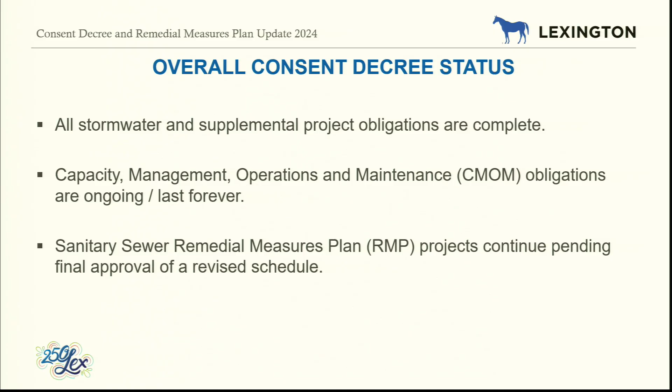The RMP, the sanitary sewer RMP projects—that's really what the focus is today, because we've been pounding on that rock for a long time, and we will continue to pound on that rock. That rock got particularly hard around COVID. The pandemic completely blew the wheels off of all the momentum that we had, given that we had to average between 6 to 8 projects a year under construction and complete. That was virtually impossible to do when the pandemic came along. Even in the aftermath of the pandemic, supply chain issues and cost escalations created a lot of challenges. We finally are, I think, beginning to get our momentum back now from that event.

Through the course of that event, we had petitioned EPA about giving us more time. When we negotiated the consent decree in 2006 through 2008, nobody contemplated there would be a worldwide pandemic like what we went through. We felt like we could justify, and we did, that we needed more time. So in September of this year, EPA went back to court, and the federal judge approved an extension for the consent decree.

It was 2026. Now it's 2030. What a relief. Now, it seems like a long time, but in our world, it's not. It takes a really long time to develop and build these capital construction projects.

I keep wanting to always think about Buckhorn because we get complaints all the time from there. Anyway, it's been a long project. This was the project we came up with that avoided going across Overbrook Farm. As disruptive as this has been, I keep reminding people we basically saved $25 million by going in this direction, and it's finally beginning to wrap up. I think the pipeline will be in service probably sometime in the spring of next year. We're working feverishly to get the paving done.

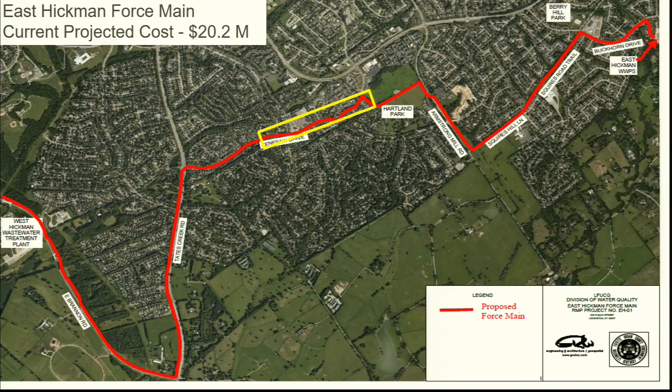That section right there in the yellow box probably will not get done. The best we can do is probably get the concrete up to the surface and try to smooth it out for as much as possible. I make the personal sacrifice on that because I live inside that yellow box, and I get reminded by my neighbors every day about how the road is still messed up. But we're getting there with that one. It's important because it's the connection point for this project.

If you've driven out Armstrong Mill Road towards DeLong, you probably noticed a lot of work going on in the field, and you're right. That is the DeLong Road pump station, and hopefully it will look just like this. You wonder whether the artist rendering is actually going to be the reality. I don't know who that guy is right there.

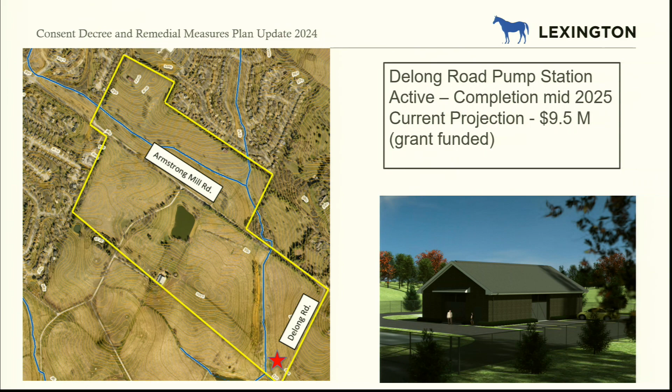This one I think is actually finished. When I put this presentation together it was active, and it's not anymore. I keep getting my buttons messed up here. There we go - this is what we call the Wolf Run F trunk sewer. It comes along Wolf Run and comes up behind Frisch's, what I understand may not be Frisch's much longer, and went under Harrodsburg Road, a couple bores, worked its way across Clays Mill Road, came up South Bend, and has stopped here on Lafayette Parkway.

Lafayette High School is roughly up here where the blue horse is. I had the yellow box around it because they were still working there, but when I went by last week, it looks like they've wrapped up.

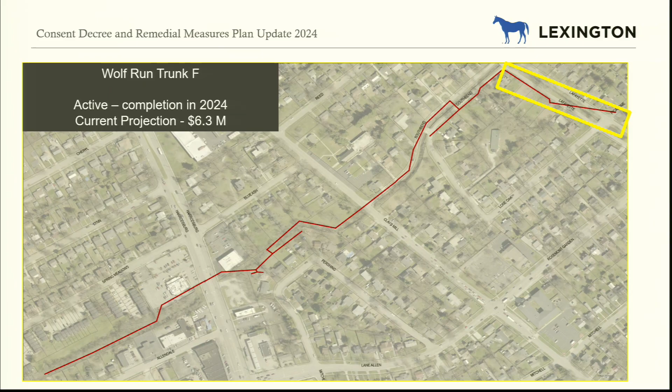The particular interest for the neighbors has been how good they've been out there. They've really been very cooperative for what they've had to go through, not with us, but with Kentucky American and all the other utilities - we've got a laydown area on these three lots that were bought as part of the Stormwater program for flooding abatement. They would desperately like to have those lots back, so we're working really hard to get the next leg of this, Trunk G, underway. It's out for bid right now. I think it's supposed to be awarded on the 17th.

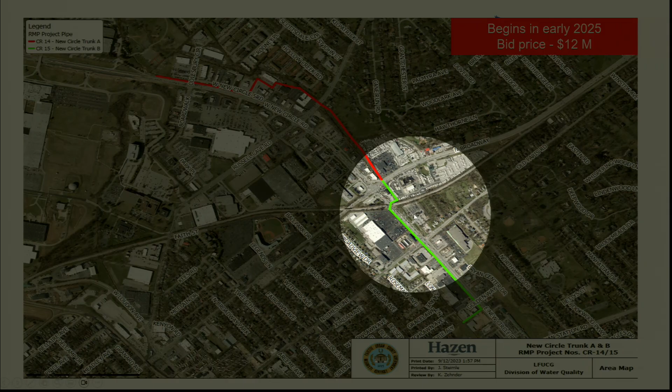There's the tennis courts for the park there. And basically coming along, we're not in New Circle itself - we're working on access roads through parking lots and everything else, working our way over, and then we cross over roughly where the railroad overpass is, and then come along what is the old Kmart building, which will actually soon be the new water quality building, and then come along New Circle here and tie in on this end.

This is one of those projects that impacted the cost graph I mentioned before. The original budget for this was $9 million, and you can see it came in at 12. So hopefully that is an anomaly and not necessarily a trend.

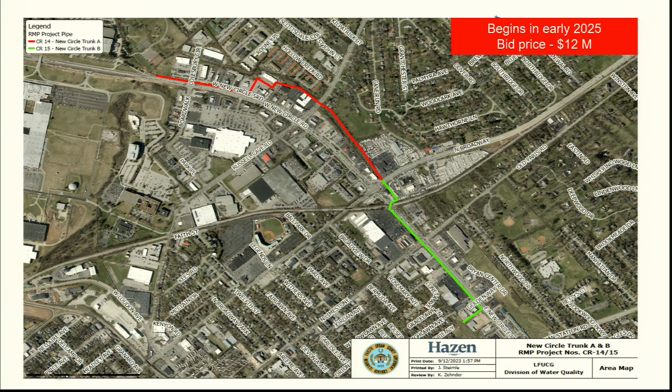Stonewall Equestrian Estates basically has a platted field that they use for storing horses. That's why they call it Equestrian Estates, I guess. And so our sewer goes down the middle of it. We spent a lot of time working with them because they were equally concerned - it's their horses, their pets, their investment and stuff.

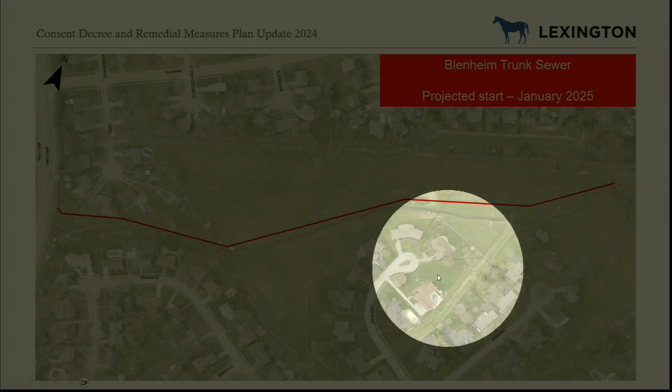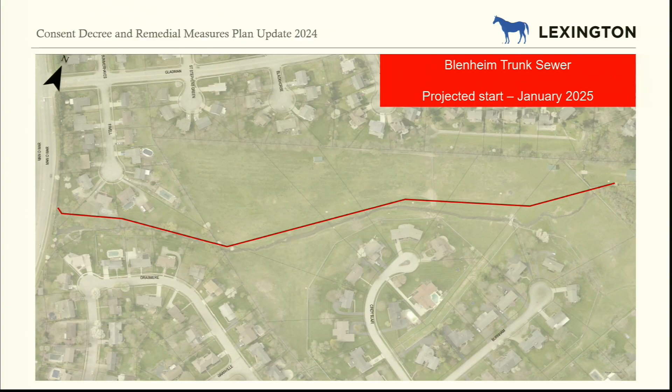And how are we going to be able to protect those horses while we had heavy highway construction going on, using basically the access way, one way right through here? Well, we finally decided we're boarding their horses. We're going to pay to board them for 5 months, 6 months max. Basically get them out of there. It'll make it easier for the contractor, it'll put them at ease, and from the overall expense, it's not that great. We've never done that before, but there's always something new every time in RMP world.

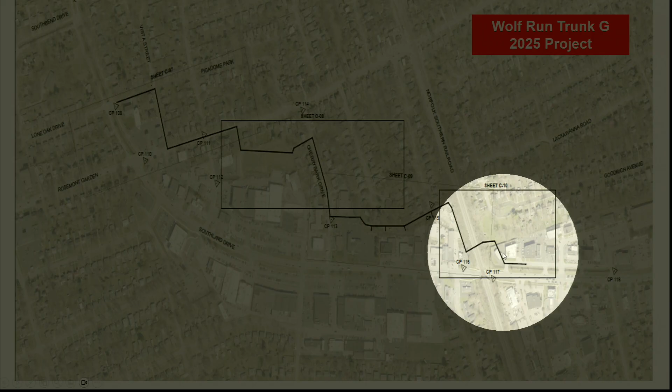This is Rosemont Garden, back behind the businesses on Southland Drive. Basically here we go through the back parking lot of Milward Funeral Home, along these properties here that we actually already own, and then cross over. Here's the dry cleaner, and basically it ends just past the dry cleaner. So an example of why getting that dry cleaner and getting that site cleaned up was important to us from an RMP standpoint.

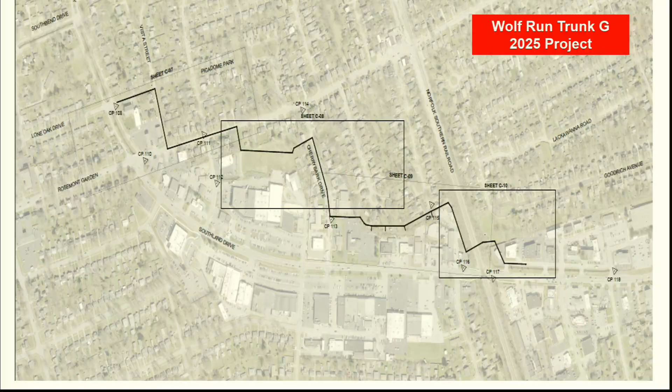Moving back across town, I like to get everybody jumping around back and forth here. This is the Floyd Drive sewer. It is pretty close to being ready to be bid, so it will be under construction next year. The impact is going to be really here on Floyd Drive because we're in the middle of the street, and we're going to have to figure out some kind of traffic management plan.

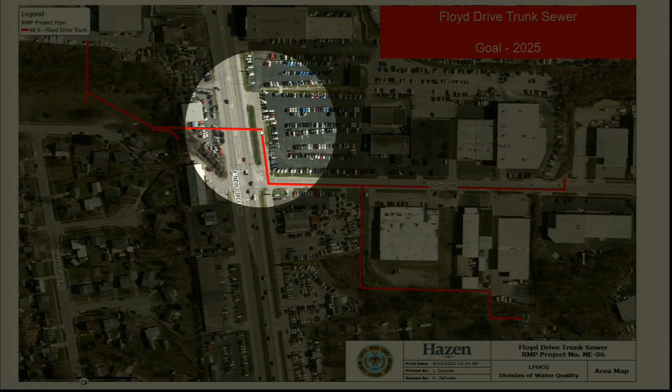The good thing is they'll come down here in front of Green's Toyota, but there'll be a bore pit built right there and a receiving pit built there, or vice versa, whichever way they've got it laid out, because you drill under New Circle and pop out onto these properties down here. These are also flood abatement projects, properties that were purchased by Urban County government several years ago. But if you do any business over on there, be watching for that come springtime.

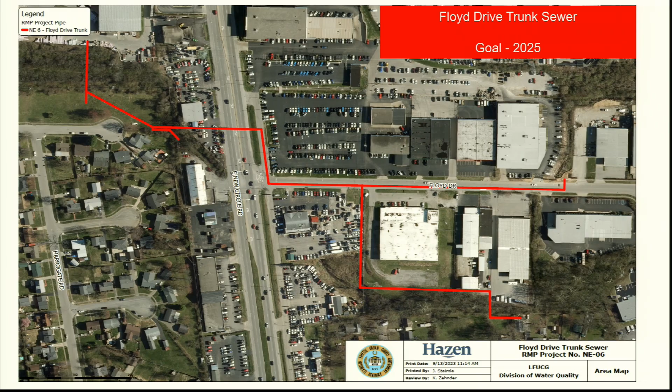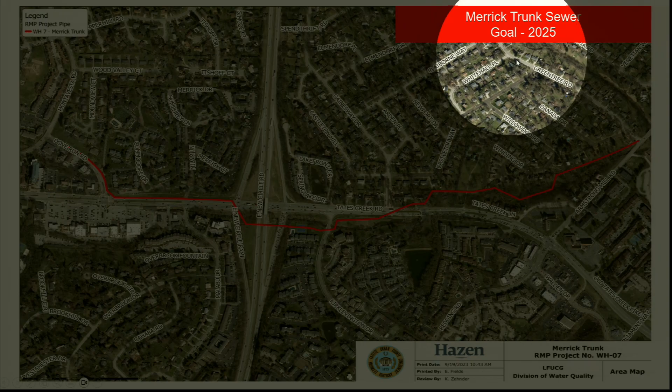We'll be there. Last one I wanted to highlight a little bit because this one's been very, very difficult, and this will be an in-your-face one for everybody that lives on the south side of town. This is what we call the Merrick Trunk. I made light of Green Tree and Gainesway and all the havoc that we had there for the last 18 months. There's another project that starts from that lot where we've been storing stuff at Armstrong Mill and Green Tree for what seems like forever.

There's another project that comes back behind the properties here on Willowwood and works its way along the creek and then across Tate's Creek Road. We have to bore all the way under these ramps for New Circle Road. And then when we get on the inside on Tate's Creek Road, we're basically in the drive lane.

We're going to have to come up with an Uber traffic control plan for that, because if you come from the south part of town and you're trying to come in via Tate's Creek Road, it's going to be a challenge. You're nodding your head.

Yeah, I live down there, so yeah, I may leave for work at 3:30 in the morning just so I can try to avoid it and stuff.

We've been working on this one for a while because the easements are very difficult. Somebody had mentioned to me a few weeks ago about ecologically sensitive areas. I mean, this area down here is one that I'm really worried about because we're just so close to the creek. We make a couple of creek crossings. The original sewer comes back behind these houses and is basically in their backyards.

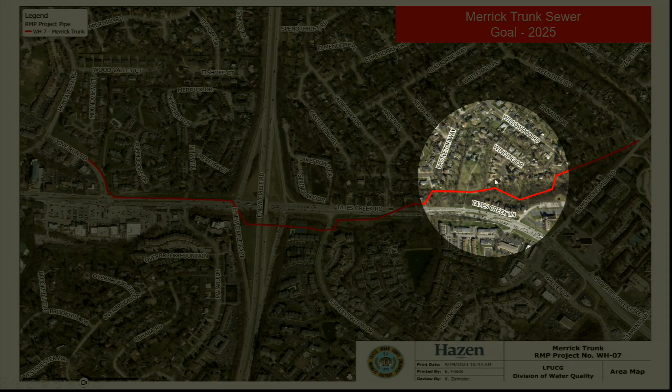So we moved to the other side because this is a remnant property basically owned by nobody. We spent a lot of time trying to figure out how to get an easement. I tracked down the daughter of one of the 4 people who owned it, and she didn't even know it ever existed. It was owned by a corporation that has since gone defunct. Tracy knows all about those kind of things. That happens, unfortunately, all the time. But anyway, a lot of work that we're going to have to do in trying to make sure that we protect those stream banks in a post-construction manner, and we're still working through that.

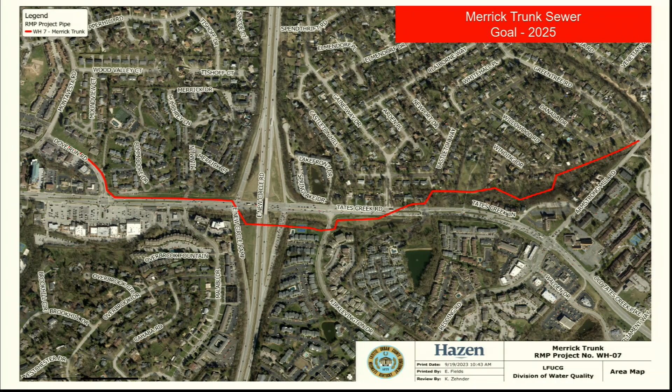Other projects that are in the queue, the Trunk F project, which is in the 5th district. It's back behind the houses on Barrowwood in the woods, just on the downstream side of Alumni. A lot of trees, a lot of really expensive houses. We've already had one public meeting out there.

It's funny how people are. You know, I'm advocating to people that we do everything we can to try to avoid trees. You can't replace a tree. You can replace a yard, you can replace a lawn, you can replace fences, you can do all of those things. And we see this all over town with the projects we've done already. It looks bad when it first happens, but when it's over and a couple of years go by, you really can't tell that we were there before.

But, you all know this, if you take down a 100-year-old tree, you ain't gonna get that back in our lifetime. But it was funny, nobody at the meeting was ready to sign their easement document, but they were ready to sign their neighbors that caused it to go over into their yard as opposed to theirs. So we're going to be working through that one in the queue, but I'm not so sure we're going to see that for 2025. The Plainview trunk, I think we're ready to go with that one. It's just a little small segment by New Circle and around the Alumni Drive area.

And then the East Hickman Pump Station Phase 2, this was an ARPA or a Cleaner Water Kentucky grant-funded project. What's interesting about this one, this is the pipeline that goes through Buckhorn, Kennesaw, the big pipeline I showed you at first. That's a long pipeline, and long pipelines typically equate to odor issues. So we've done a lot of research in the odor area over the last 18 months, and we've seen some places that are using a system that is injecting oxygen into the line with the sewage in order to be able to keep the oxygen level up and not allow it to go septic.

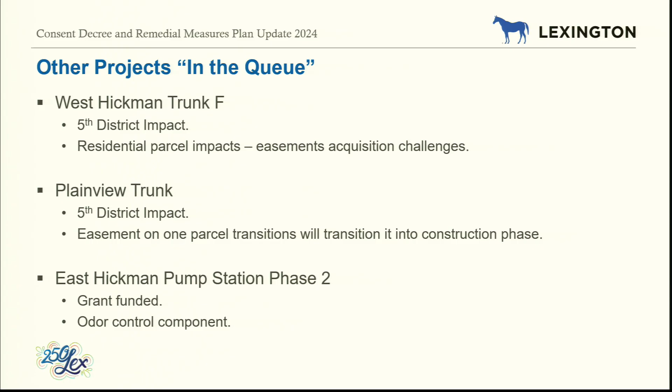All right, in summary, full compliance deadline is now December 31st, 2030. 65% of the capital projects are complete. Of the 117 reoccurring SSOs that were identified in the consent decree, 86 of those have been abated. We're getting there. We're really getting there. The total project cost is trending below, but I do worry about cost escalation. You know, it's the reality. The cost is one thing.

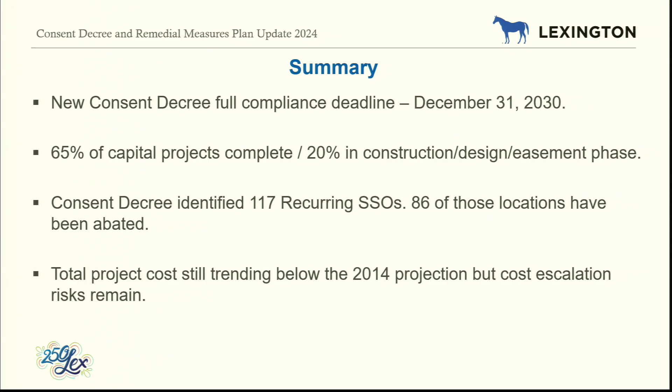What is really troubling for us as much as anything else, supply chain is still a big problem in my line of business. If it requires a chip or something to turn on the pumps, you wait forever for the thing that actually turns it on. I've got one project right now. We've had the pumps in dry storage for 11 months waiting for the control panel to be able to install them and turn them on. So, okay, with that, questions? Yes, sir.

Yeah, odor control is not part of the RMP, so I didn't cover it here. I only brought that up because it's related to that other project. I felt like it was better this year, and I really thought it was better this year until we got to October. When we got to October, it seemed like it kind of went backwards on us pretty quickly. We've made several improvements at West Hickman already. There's another project that will be starting sometime after the first of the year that replaces the activated carbon units that we have back there.

One of the biggest things we did is we cleaned up the plant. Prior management had kind of let things go in a way that wasn't apparent to me until the odor complaints started happening. They weren't managing their solids correctly, and basically the plant was constipated. And so we spent all of last year hauling sludge out of that plant. I think it was in the month of February last year, we did 53 trailers. By July, we were doing 80 trailers a month. So, I mean, we just hauled and hauled and hauled.

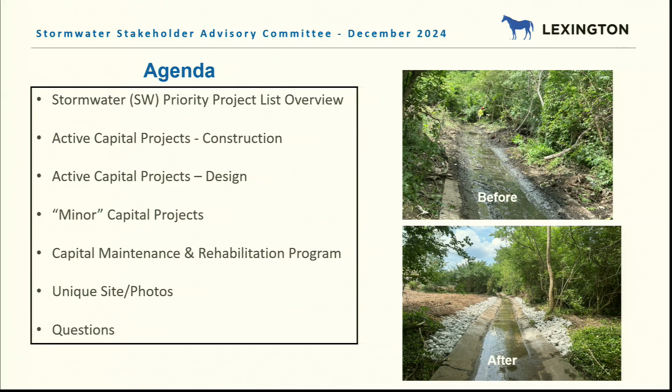For the priority list, to become a capital project, it goes through several steps. First step is we've got to be notified of the project. It has to come through like 311. Charlie, Greg receive a call, I receive a call. So that's the first thing, just us being notified. Then we'll go out and investigate.

First step in this process is the storm event. The storm event that we hold to this is the 25-year, 24-hour event. Anything over that, a 50-year event happens, our system can't handle it. So there's a limit to what our system can do. If it is under the 25-year, then it moves out to a maintenance issue on flooding. Like, what's going on? Is it something that can be cleared up through leaves or blocking an inlet? Or has a basketball got stuck in the storm pipe? So we'll see if our maintenance crew can fix the problem.

If they can't fix the problem, then we start scratching our head going, hey, there's maybe something going on here. That's when it turns into a preliminary engineering report, where we actually start seeing, can we see what's going on? Can you model this? And sometimes even though we get to that engineering stage, that doesn't mean there's always going to be a solution. Sometimes there's just not a fix here. But if there is, then we figure out the problem. There's an equation where we compute the severity score with the others, it gets ranked, and then it'll get a green light to get on the list.

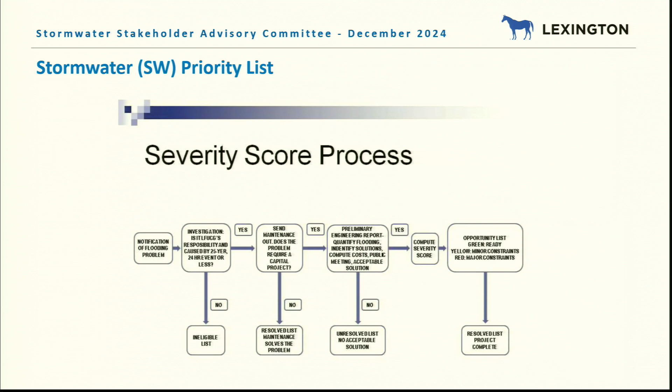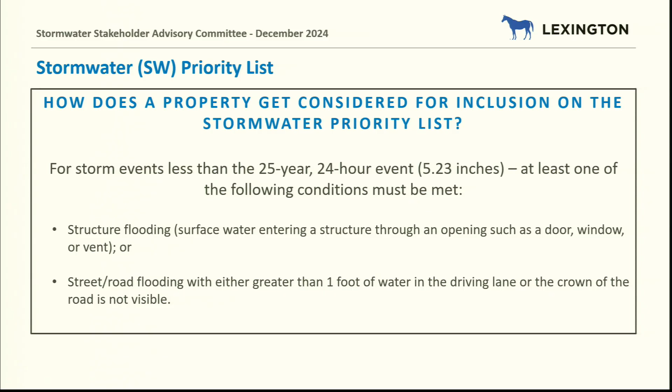So like I said, the two biggies to make it to the list: one is the storm event. It's got to meet the storm event. The other is street and road flooding, this bottom one, with either greater than 1 foot in the driving lane or the crown of the road is not visible. So one of those two has to happen.

Where's it at? You can go to the Stormwater website. We keep this list updated, we try to update it every January. The link's at the bottom. I know we've recently updated our website, I think it's still kind of the same. If anybody goes there, they can see it's ranked from 1 to, I think, 100, somewhere in between. We start at the top of the list and work our way down. Right now, we're in the high 80s, low 90s, so we've been at this for a while. And some of the capital projects that we're getting ready to talk about are coming from this list.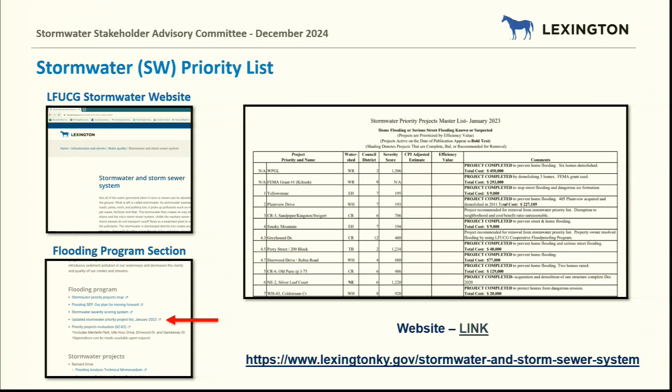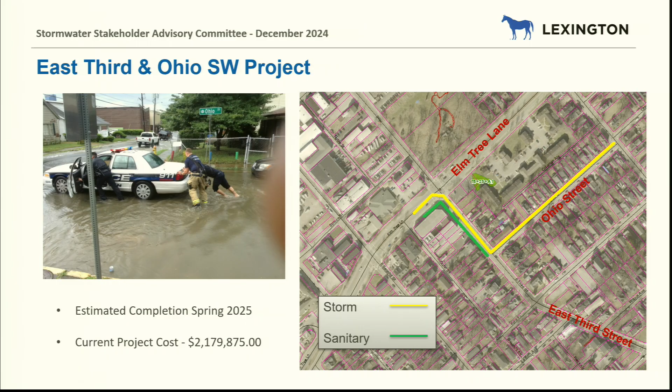Currently, the contractor is about halfway up Ohio Street, planning to finish late January, early February. Cost for the project right now is around 2.2, is what the bid was. Just some construction photos that I grabbed along the way.

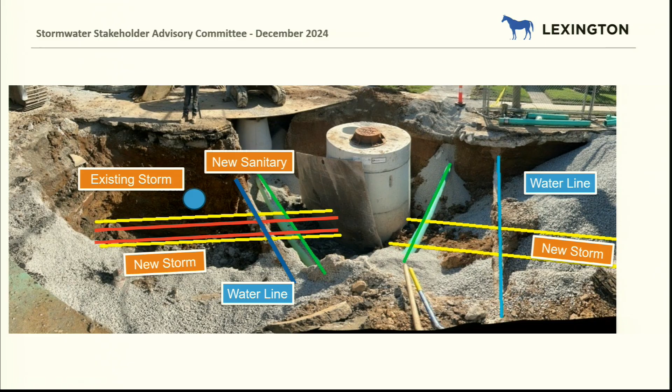I like this photo because whenever you're, be it storm or sanitary, working in town, you have a lot of utilities to encounter. The new storm is this yellow line coming this way. There's an existing storm, the 2 red lines, that's being replaced, the existing or new sanitary coming down, a water line, another sanitary on this side, another water line. There's a gas line also that I don't have in the picture. So there's a reason some of these projects don't move as quick as they do out in open fields. I just thought that was a neat photo.

Another project that just finished up this past fall is Lyon Drive.

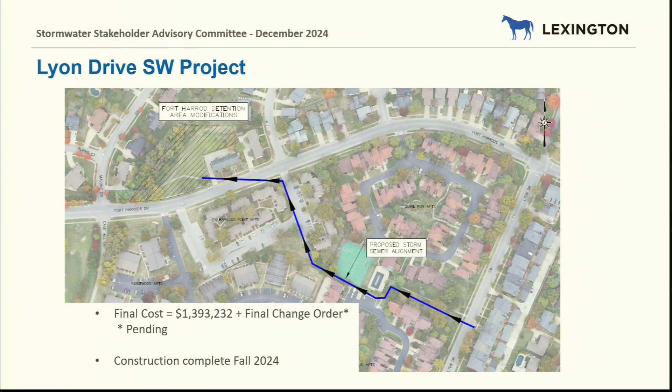This project was fixing flooding over here on Lyon Drive. It's cutting through two apartment complexes, around a tennis court, around a swimming pool, and in the upper left is a detention basin that also got rehabbed through this project. It came in a little bit over 1.4, and like I said, just completed this fall. Like Charlie said, during construction it does not look good, but post-construction, that's when we're trying to get everything back to the best as possible.

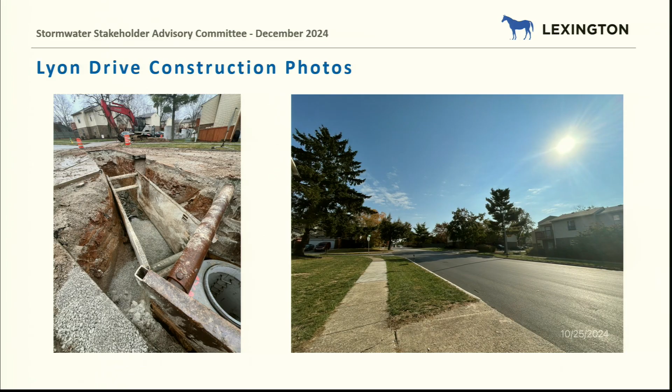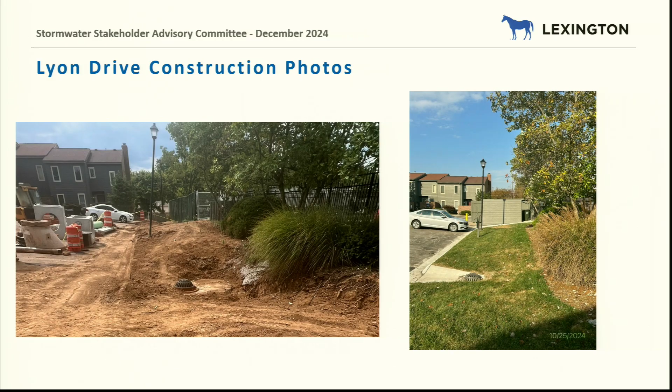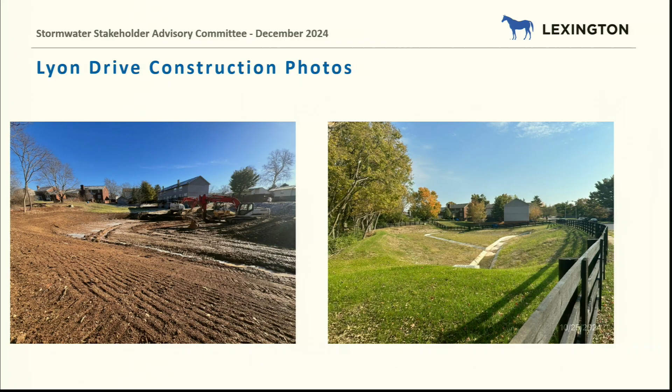Next project is out Joyland. This one's a two-phase project. Last year I spoke about phase one, which installed 3 detention basins. Just from the size of it, we kind of had to break it up into 2, because whenever you have a severe flooding issue, you've got to have a place to put the water, so we're not passing it downstream. So first phase was creating the detention to put the water. Second phase, which we're getting ready to do, is the infrastructure to get the water to the basins.

So phase one's complete. That was creating detention on Lisa, Cabot, and Shandon. Phase two is going to be creating the new infrastructure. Phase one came in a little under 1.3 million. Phase two, we applied and were awarded a FEMA hazard mitigation grant for a little over $1 million, but just for construction, $999,000. Low bid came in a little over $1 million, so we've already got awards, and it's going through council right now for approval, with the intention to start early '25.

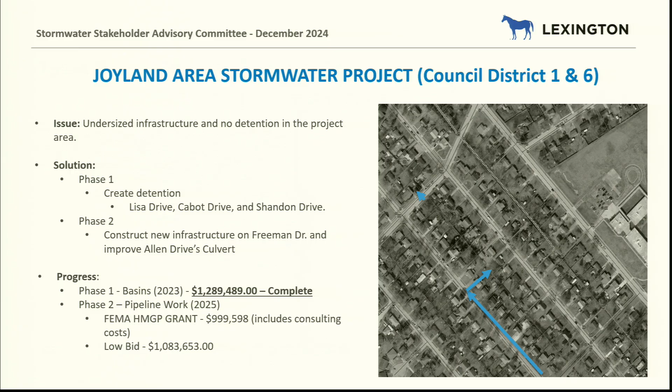So these next couple are projects we actually have in design. Cooper Drive, 2 areas that this is addressing. One is some flooding right here on Cooper, and then up here on Romney. This project's 100% complete. We've got plans ready to go out the door. Kind of just holding them right now through winter, so we'll hopefully get better bids after the holidays. Estimate's going to be around the 2.5 mark. Traffic control is something we've been working through, but we think we've got it pleased.

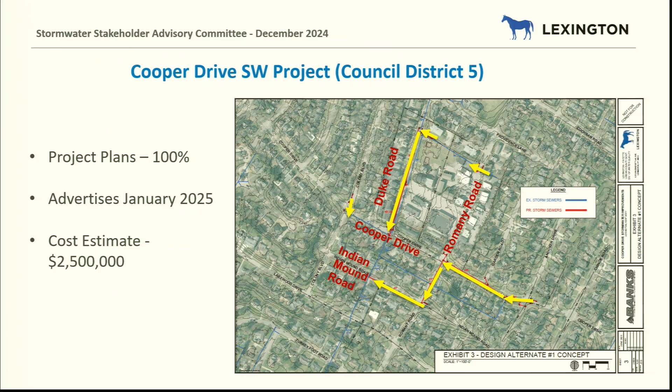Mentelle Park North, down here to the south is Richmond Road. This is also broken up into 2 phases. These are all on the priority list. I think this one's like number 87. This first phase of Mentelle is going to be addressing flooding on Mentelle on this northern section, taking new line up to Cramer, and then from Cramer down North Ashland, and then tying in to the existing system there.

Will that project improve the stormwater sump pump flooding that occurs at Ashland and Cramer? It completely ices over, and I have a friend that has a front seat view to children falling in the intersection every morning, all winter long. Where is that? Ashland and Cramer? Yep. The Cramer sump pumps flow down the street and pool in that intersection and then freeze.

We had a public meeting a couple weeks ago, and I think that intersection was mentioned. So we've told our consultant to keep that in mind as we're working through final design. If everything goes good, target for construction's late next year. But we always get into two big issues. Charlie mentioned it. One is easements, because that's a big hold up. Another one is existing utilities; until we get into final design, you don't know if we're going to have a conflict with a water line, gas line, or something. Their budget might not be at the same pace as yours, so that's where we're at right now with this one.

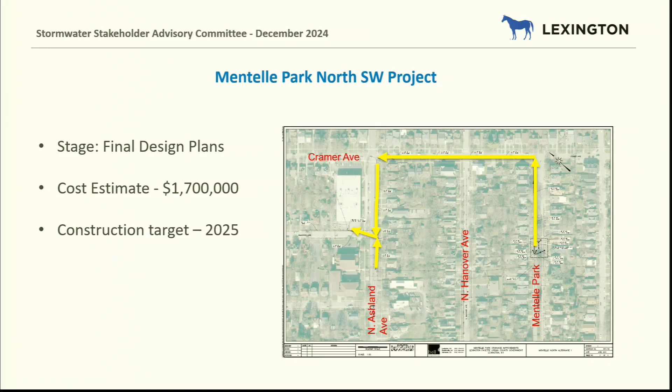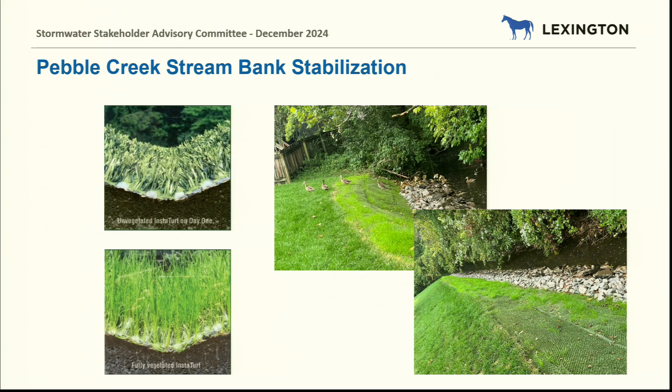So some minor capital projects that we've got going on. Pebble Creek stream bank stabilization. This is kind of cool. We used a new product called InstaTurf. You can kind of see the before and after on vegetation. This thing sprouted up like crazy. So tickled with this, as you can see in the photos. Some of the ducks are as well.

Elizabeth Street culvert. I can't remember what the cross street is. The culvert runs kind of like that across the street. A third-party garbage truck got too close to the curb inlet and actually collapsed the curb inlet, which in turn collapsed the culvert. So we've got it rehabbed right now, but we're going through a design to replace this culvert just due to its age, and get everything fixed back.

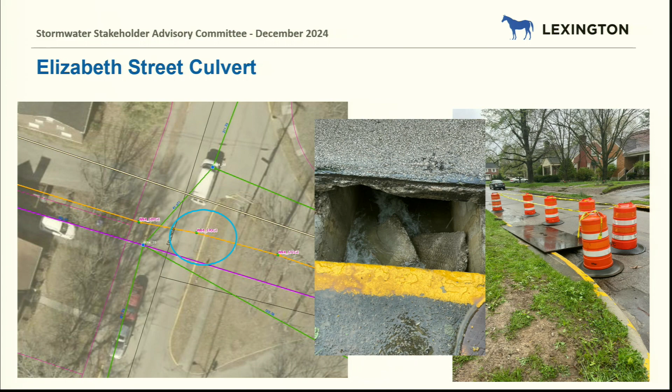You can kind of see some of the older brick on top. Town Branch culvert, very similar.

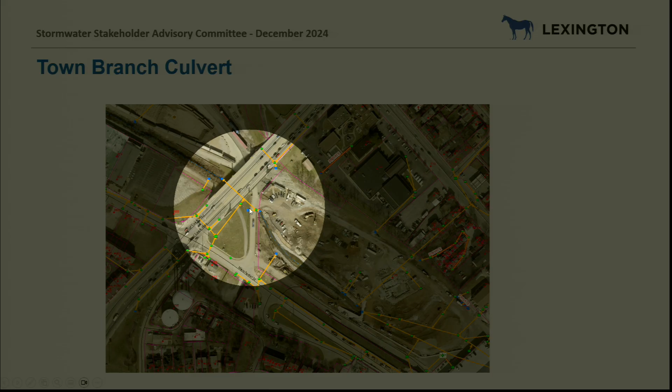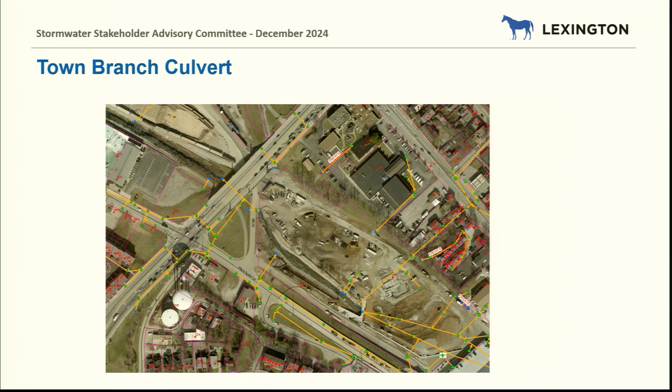Right around here on Cox Street, there used to be a curb box inlet that was removed. This is the big park project to the southeast of this. The curb inlet was removed, but the box was never actually rehabbed, so this project's going to be going in and actually fixing this hole.

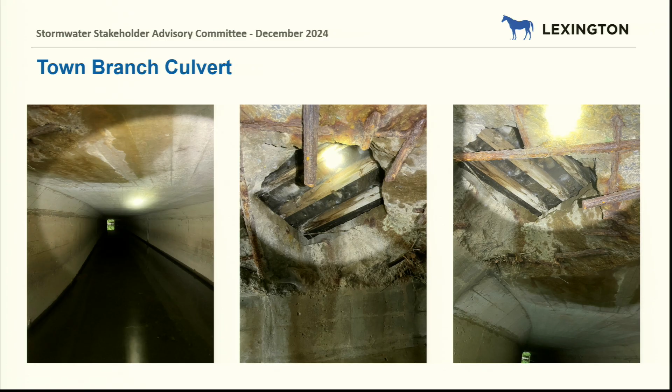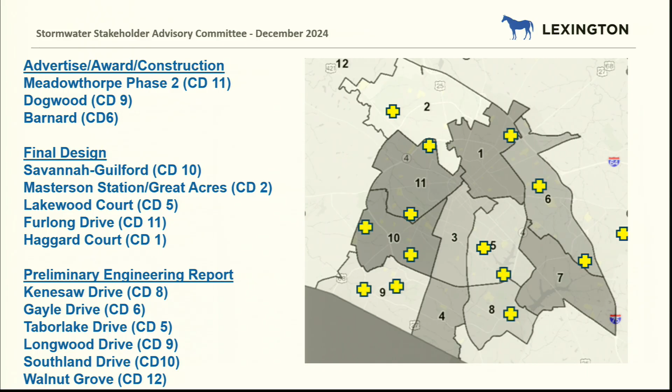So the infrastructure program is a program comprised of three full-time employees that have a $1 million budget to rehab or fix any existing stormwater infrastructure throughout Fayette County. The urban service.

With our GIS, I had some numbers pulled. We have I think it's either 905 miles or 805 miles of storm line, and over 50,000 structures, be it head walls, inlets, manholes. So there's a lot of infrastructure that needs fixing.

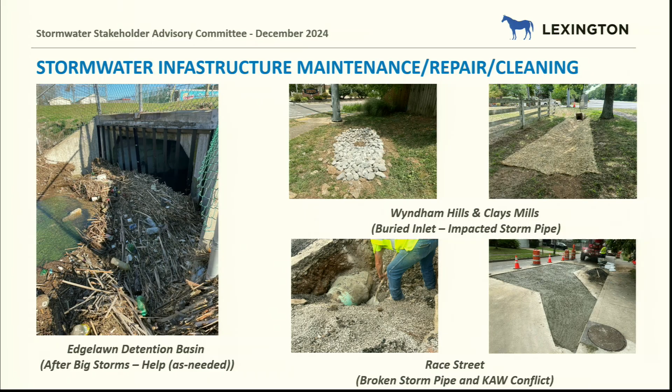We get a lot of debris that kind of collects on some trash racks that we'll help with. Inlets full of trash, cleaning flumes - they'll work all hours of the day. Debris blocking, and then broken inlets we see probably the most.

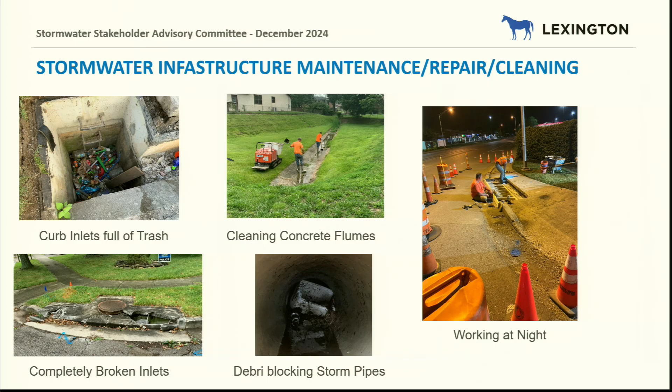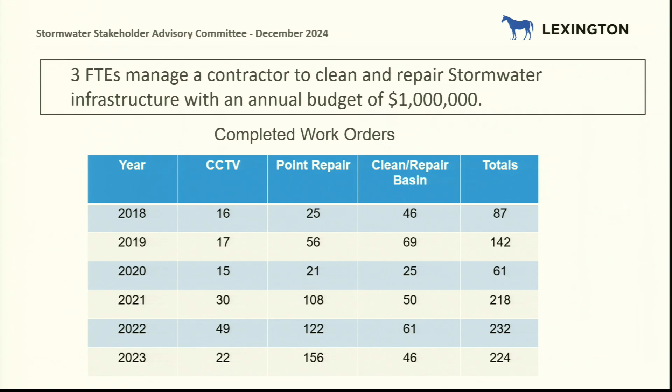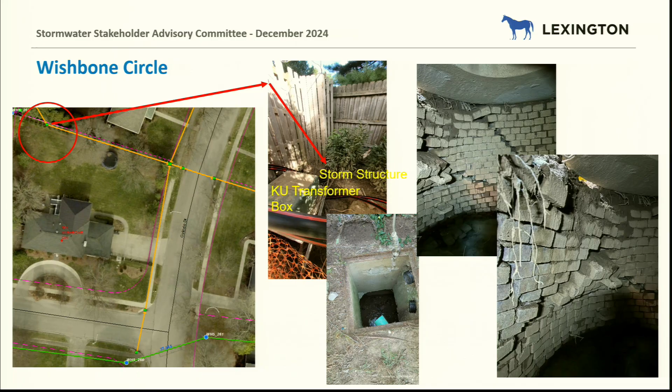Werne, this was kind of interesting - this blue line is kind of in conjunction with this picture. You can kind of see the water is kind of pulled up out to this lower half of the cul-de-sac. And this is a normal, just everyday summer storm event, so nothing, it's not a crazy thing.

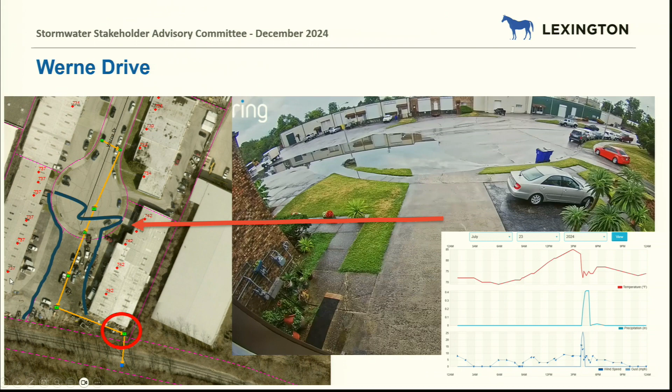Well, they went down and found - I put the little hydrograph - they went down and found this structure right here is just completely impacted, this one on the left. So they cleaned that up, was able to put a structure in, then put a grate, did some stone around it.

The whole little commercial group out there is tickled to death. They've not had an issue since.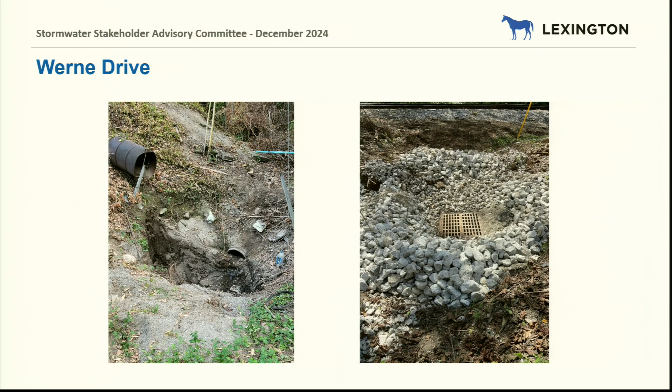Crossbores, see this a lot - gas line come through, water line come through. We'll call them, they'll come out, kind of help work with us, get it kind of relocated. This one was actually, whenever they was out fixing their line, we found an old set of tools actually in the storm pipe for whatever reason.

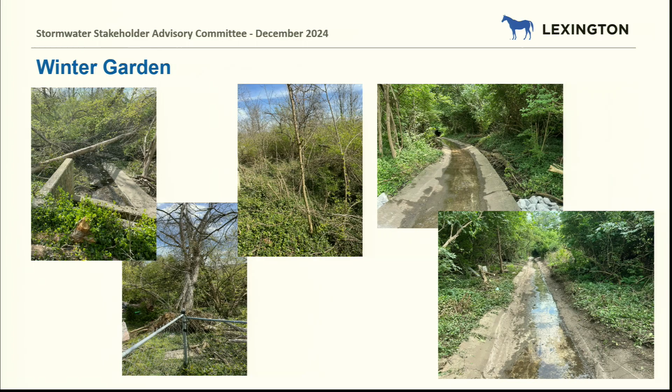But winter garden community, our concrete flumes, is another thing that's part of city infrastructure to kind of help maintain. This one on the left, you can kind of see it a little bit overgrown. So on the right is after they've kind of bushwhacked and hauled everything off.

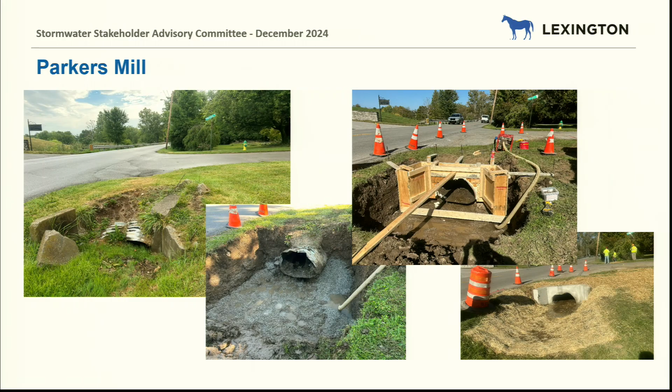Parker's Mill on the left, concrete or corrugated metal pipe just completely almost collapsed. Got it straightened up best we could, and got it working good.

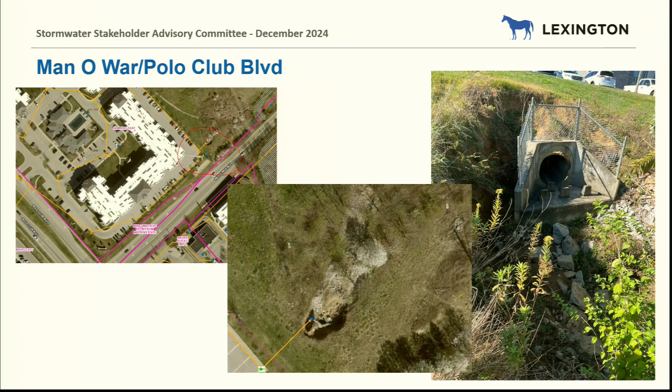Polo Club, this one - you got Costco down here to the south, Man O War, Polo Club, so this little intersection. This just shows what happens whenever the end of the pipe in the head wall isn't fully connected. There's a little gap in it, and as such, you can kind of see the erosion that's going on down here to the south.

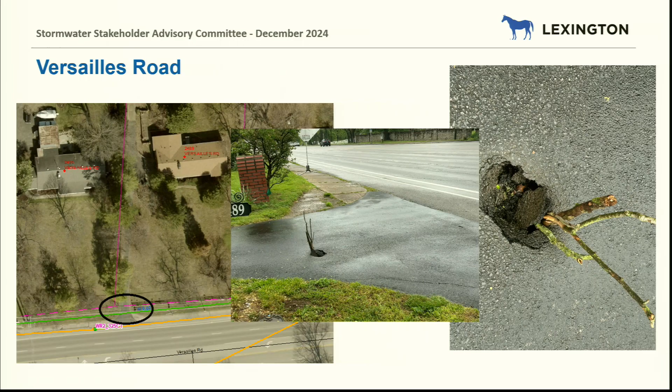Hi Mark, I have a question. Steve Evans. Could you tell me if you have a policy for when you use concrete flumes as opposed to vegetated channels, with the promotion of infiltration through the vegetated channels? So when do you decide to use one versus the other?

Since I've been here, I don't know if we've used concrete flumes that I can remember. In the design, that's usually on the consultant to kind of help tell us what works, what doesn't work. But since I've been here, I can't remember us using a concrete flume. I don't know if I dodged your question good, but no.

I didn't have a question, I was just going to add that a lot of those programs you were talking about came from the consent decree. We didn't have a stormwater maintenance program really per se until the consent decree came along, and in the aftermath of that, Mark and many others helped build that. That's why you saw the maintenance work table he had up there. It started in 2016, I think it was. Yeah, it's one of the first years that we funded that, and it continues to grow because there are definitely a lot of needs out there.

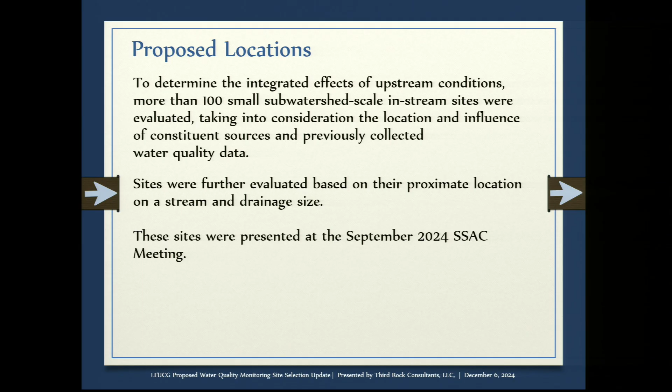100 sites, all those yellow dots, and we called out all the different major watersheds in Lexington. We whittled that 100 down to 59 sites that we thought made sense to propose going forward with our monitoring program.

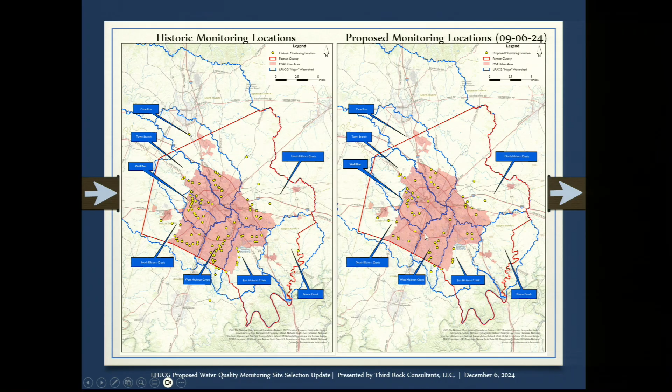So just rehashing that. On the 10th of October, we met with Tetra Tech, LFUCG, volunteers, and other members of the scientific community, and we wanted your feedback. We really pride ourselves on the fact that Lexington's water quality program has a heavy volunteer and scientific community.

I forget the word I'm trying to use, but their participation. I'm still trying to wake up this morning.

So we wanted to say, if we're going forward and making changes on this program, we want volunteer input. We want feedback from the community to make sure, since you guys are going to be the ones doing this, that you're happy with it.

We had some really good feedback, and Abby at Tetra Tech did a SWOT analysis on it to see the strengths and weaknesses, and maybe some opportunities we were missing out on. We only had 2 hours, and some of y'all had a lot more to say than we could cover in that time, so after that we got more feedback through email correspondence.

Here's just a summary of those site revisions. There were some sites added downstream of other urban areas - not areas in the main urban service boundary, but urban areas outside of it, like the horse park - and also looking at expansion areas.

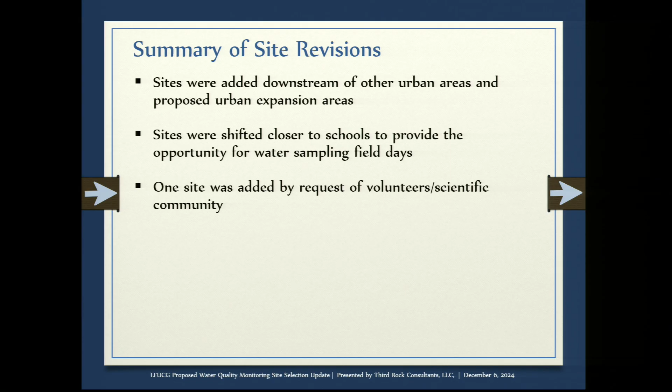Additionally, we talked about some of the monitoring methods and frequencies. Everything in black here is what was previously presented, but there were a few changes that the project team and some volunteers wanted to stress, to make sure were carried through into the proposed monitoring program.

So again, we're doing quarterly water quality grab sampling with trained volunteers regardless of the weather, plus one wet weather grab sampling by a qualified sub-consultant. What we changed was, in a different work order, we routinely collect wet and dry quarterly grab sampling at 7 major watershed sites.

To continue that frequency for statistics, and to make sure we're capturing the major watershed sites, we decided to clarify that and add it back into the proposed monitoring program, rather than grouping those in with just quarterly water quality plus one annual. We wanted to make sure there were wet and dry quarterly samples at those sites.

Along with this, we're not just doing water quality - there's macroinvertebrate sampling, fish sampling, and a new geomorphic and erosion assessment that we are proposing. At those quarterly sites, we typically do an annual analysis of the macroinvertebrate populations there.

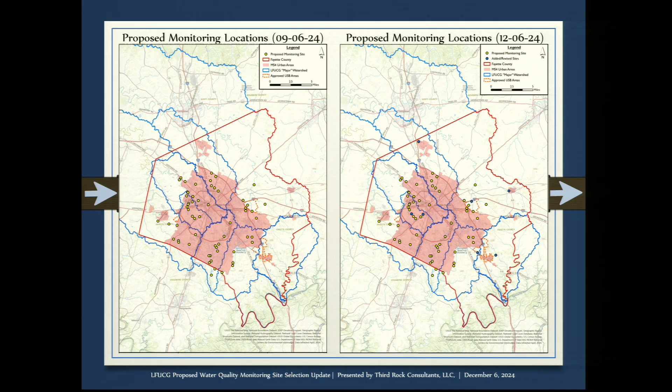On the left are the sites proposed back in September, the 59 sites, including the little urban service areas on the outskirts. After the meeting, volunteers asked whether there were sites over there in urban service areas, and that was an excellent question. So we went and looked at some sites that made sense, including some we'd previously looked at or had historic data on, and added those in. On the right, which we're proposing today, those blue dots are sites we added in and swapped around. Those are the revised sites. We added 5 sites and swapped a few around, bringing the total to 64 sites, with all the changes to the methods and frequencies we discussed back in September.

So a little bit shorter presentation. We do have some time for questions and discussions.

Does Lexington have any TMDLs that you have to report on? For the TMDLs, Abby, do we have to do anything with that? Not that we have to report on. We do have bacteria TMDLs, but there are no numeric limits associated with those in the MS4 permit. The language is that we have to make progress towards achieving those waste load allocations, done through implementation of the SWMP. We also submitted a draft TMDL strategy in the 2020 MS4 permit report, and right now we're working on a status report on what actions have been implemented to date.

I have a question about the benthic macroinvertebrate sampling. Are there only 7 sites being done for bugs, or more? No, I apologize if I created confusion. We have 7 sites that we currently do annually. We presented that we're doing it for all 64 sites, but 7 are done annually because we've done that previously in the past. The other 57 sites we're doing biannually, which is a pretty intensive process. This is a comment for Director Martin: that's the best money we can spend, in my opinion.